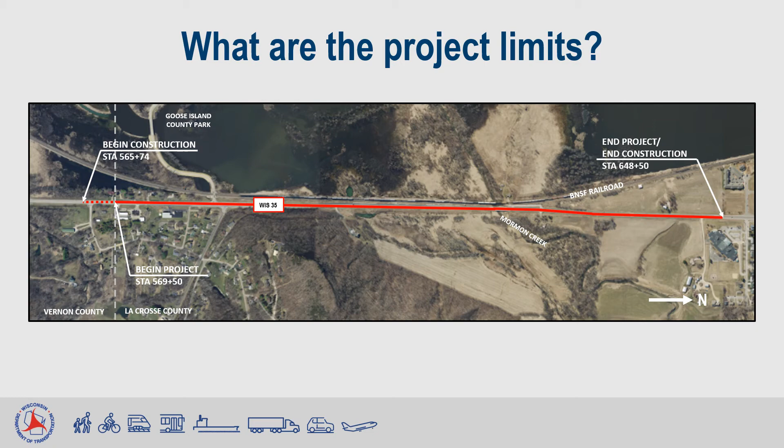Why do we need this project? The following needs have been identified on this section of Wisconsin 35. Deteriorated pavement, traffic safety and operations on Wisconsin 35 at the County K and County GI intersection, substandard culverts and overgrown ditches along the highway south of the County K and County GI intersection, existing deck, parapets, and abutment deterioration for the bridge over Mormon Creek.

The existing pavement on Wisconsin 35 is experiencing distress and significant cracking, along with raveling edges and centerline deterioration. This pavement deterioration causes increased maintenance costs, poor ride quality, and presents safety concerns. County K intersects Wisconsin 35 from the east at a skewed angle of approximately 65 degrees. This skewed intersection geometry is proven to create operational and safety problems at stop-controlled intersections.

The intersection of Wisconsin 35 and County K is offset approximately 150 feet to the north of the intersection of Wisconsin 35 and County GI. Compared to four-leg intersections, offset intersections exhibit more crashes. In addition, County GI has limited vehicle storage length between the railroad crossing and the intersection with Wisconsin 35. This causes safety issues at the railroad crossing when larger recreational vehicles exiting Goose Island County Park are stopped at the intersection waiting to turn onto Wisconsin 35 and vehicles extend onto the railroad tracks.

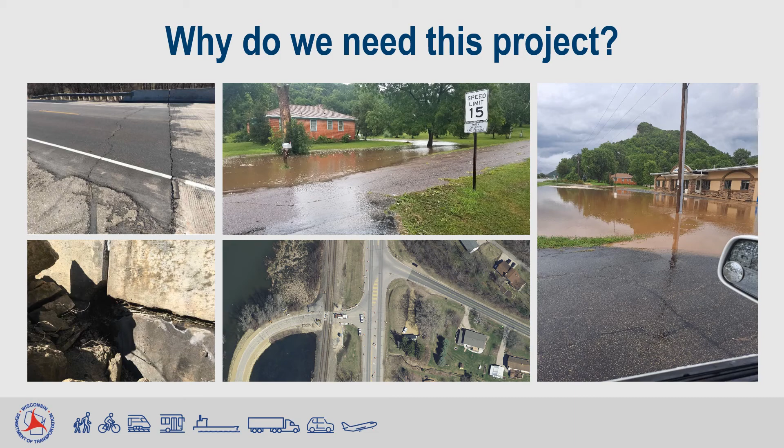Drainage concerns have been identified along Wisconsin 35 south of County K and GI. Existing culverts do not meet current drainage design standards. Culverts are plugged and ditches are overgrown, prohibiting drainage conveyance. Property owners have experienced concerns with flooding near their properties, as shown in the photos. The existing deck, parapets, and abutment on structure B32-163 over the Mormon Creek are showing signs of deterioration and damage. These deficiencies result in costly expenditures to maintain.

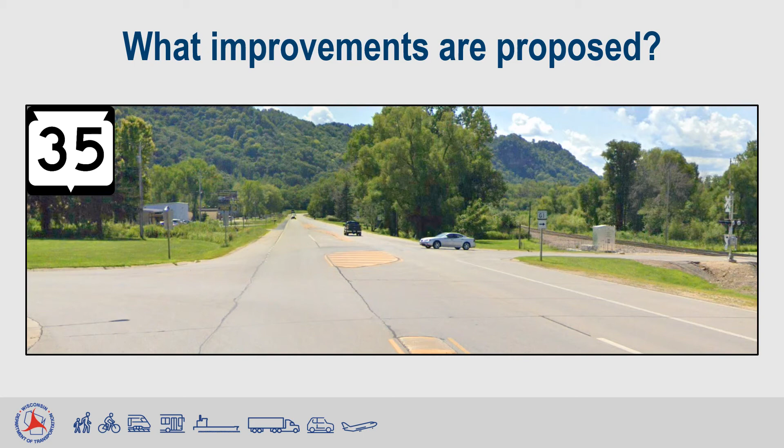What are the proposed improvements? The next collection of slides explain the proposed improvements and show the typical section of Wisconsin 35. To address the safety concerns and pavement deterioration, the proposed construction on Wisconsin 35 would consist of removing the existing asphalt pavement and gravel and replacing it with 5 inches of new asphalt pavement over gravel between the La Crosse-Vernon County line to Sunnyside Drive. The pavement structure south of the Mormon Creek Bridge would also include a subgrade improvement with select crushed material and the installation of geogrid to address underlying poor soils that cause pavement deterioration.

There would be a new shoulder gravel placed in the rural section of Wisconsin 35. New curb and gutter would be installed along Wisconsin 35 near the County GI and County K intersection. Grading will take place for a future shared use path along the west side of Wisconsin 35 from County GI to Sunnyside Drive. New pavement markings and signs would be installed.

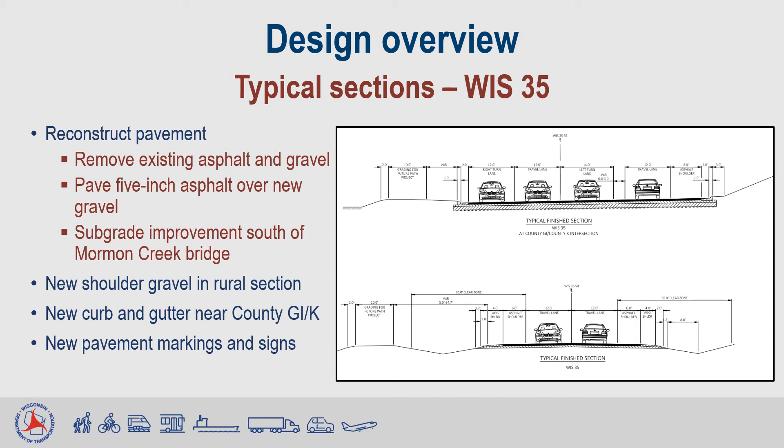To address traffic and safety operation concerns at the intersections of Wisconsin 35 and County GI and Wisconsin 35 and County K, the following improvements are proposed. 1. Realign County K to line up with County GI for a four-legged intersection. 2. Shift the new Wisconsin 35 County GI County K intersection east to increase storage distance between Wisconsin 35 and the railroad crossing on County GI. 3. Widen the intersection to provide offset left turn lanes. And 4. Add right turn lanes on both northbound and southbound Wisconsin 35.

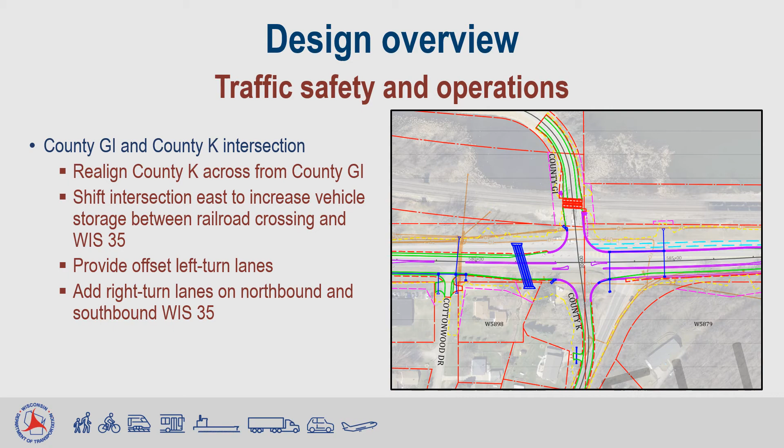A thorough review of the existing conditions south of County GI and County K concluded that the drainage discharge points can be summarized into two general locations. The North Culvert System is a set of 36-inch triple metal culverts under Wisconsin 35 just south of County GI, County K. The South Culvert System is a set of 36-inch triple metal culverts under Wisconsin 35 just north of the La Crosse-Vernon County line.

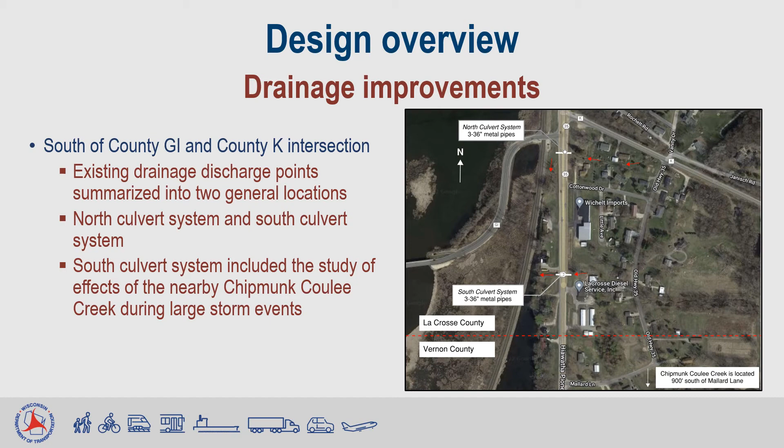As part of the South Culvert System, a drainage analysis of the Chipmunk Coulee Creek, located approximately 900 feet south of the project limits in Vernon County, was conducted to determine if the Chipmunk Coulee Creek overtops its banks and causes flooding to adjacent properties during large storm events.

When reviewing the existing terrain for the North Culvert System, the drainage area entering these culverts encompasses a watershed north of County K that enters a large drop inlet in the northeast corner of the Vanity Drive and Jansch Road intersection and exits in the southwest corner of the intersection.

Runoff then enters a 60-inch corrugated metal culvert pipe that flows under County K on an angle and exits south of County K to an existing drainage swale that flows west to the three culverts under Wisconsin 35 just south of County GI. The existing drainage swale flows between residential properties and it appears to be mowed and has limited capacity.

Based on the photos from the recent storm event in August 2021, the existing drainage swale doesn't appear to have enough capacity for rainfall runoff entering the area and is overflowing into adjacent low-lying residential area for relief. The area has seen significant flooding in the last 15 years and has been much worse than what is shown in the photo. The area in the ditch leading to the entrance of the three culvert pipes under Wisconsin 35 south of County GI is currently heavily vegetated and overgrown.

To address drainage concerns within the North Culvert System drainage area, the following improvements are proposed. 1. Replace the 36-inch triple metal culvert pipes under Wisconsin 35 just south of County GI with three 58.5-inch by 36-inch concrete pipe arch culverts and concrete masonry end walls.

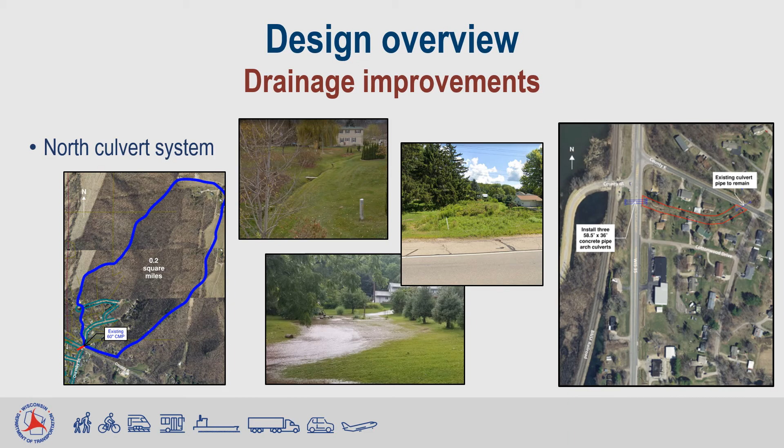When reviewing the existing terrain for the South Culvert System, the drainage area entering the existing set of 36-inch triple metal culverts under Wisconsin 35 just north of the La Crosse-Vernon County line encompasses a watershed boundary of approximately 125 feet north of Cottonwood Drive, Old Highway 35, and Mallard Lane. Town of Shelby and property owners reported that lands located within this drainage area have experienced multiple flood events since 2007. This area is displayed in the first exhibit on this slide.

Project photos confirm that the existing culvert pipes under Wisconsin 35 and adjacent driveways are often clogged with debris or buried, impacting the available capacity. This area is a low-lying area east of Wisconsin 35. A 2D steady-state hydraulic model was developed by WisDOT to review the effects of the Chipmunk Coulee Creek and how it impacts the South Culvert System study area.

The existing conditions model confirmed that the Chipmunk Coulee Creek overtops its banks and causes flooding to adjacent properties, primarily to the east of Wisconsin 35 during large storm events, particularly the 100-year design storm frequency. A portion of the overflow extends into part of the South Culvert System drainage basin, bounded by Cottonwood Drive, Mallard Lane, and Old Highway 35. This area is in a low-lying area relative to the surrounding terrain.

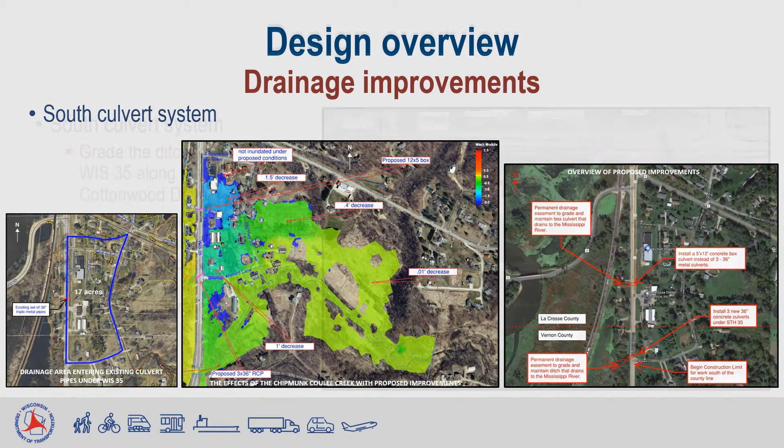Area B in the southeast corner of Wisconsin 35 and Cottonwood Drive and the ditch in front of the property located at N162 Wisconsin 35 is also a part of the sub-basin area. The rainfall runoff in this area is intended to flow through the existing 24-inch metal culvert under the driveway and the ditch along the east side of Wisconsin 35 to the existing set of 36-inch triple metal culverts just north of the La Crosse-Vernon County line, but the driveway culvert is clogged with debris and buried.

To address drainage concerns within the South Culvert System drainage area, the following improvements would be proposed. 1. Grade the ditch to drain east to west along the north side of Cottonwood Drive into a 24-inch reinforced concrete pipe under the driveway for W5898 Cottonwood Drive. 2. Install a 24-inch storm sewer system with field inlets along the ditch on the east side of Wisconsin 35 from Cottonwood Drive, exiting once past the driveway at N162 Wisconsin 35.

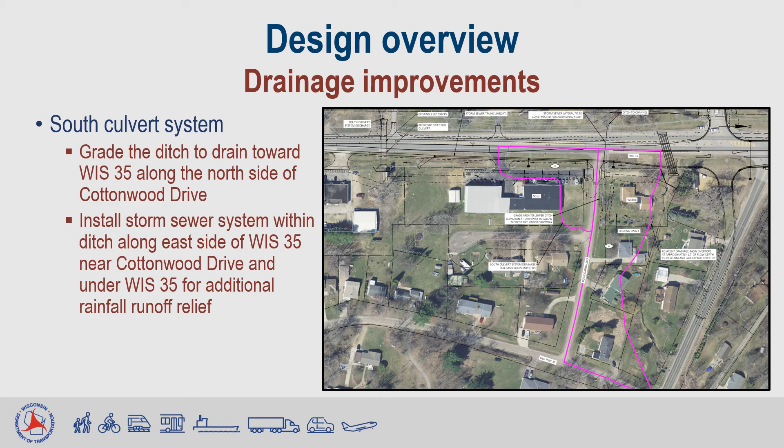And 3. Install a 24-inch storm sewer pipe under Wisconsin 35 just north of Cottonwood Drive for additional rainfall runoff relief for the sub-basin north of Cottonwood Drive and the overtopping of the North Culvert System rainfall runoff.

The Mormon Creek drainage area was also reviewed as part of the project. The existing bridge opening over the Mormon Creek has debris and sediment which has reduced the flow area compared to the original constructed opening. Proposed improvements within the Mormon Creek drainage area include: 1. Debris under the Mormon Creek Bridge and between the bridge and the railroad bridge within the existing right-of-way would be removed, and 2. Sediment under the bridge would be removed to make the bridge opening like the original construction. This would increase the bridge opening area and help with the flow of rainfall runoff.

There is an existing box culvert located approximately 0.38 miles south of the Mormon Creek that crosses under Wisconsin 35 and the railroad track along the west side of Wisconsin 35. This box culvert is part of mapped floodplain of the Mississippi River and serves as a rainfall runoff overflow of the Mormon Creek drainage area as shown on the exhibit on the right. The rainfall runoff reaches a certain elevation along the east side of Wisconsin 35 near the Mormon Creek in large storm events and flows back towards this box culvert as relief. This box culvert would not be replaced with the project.

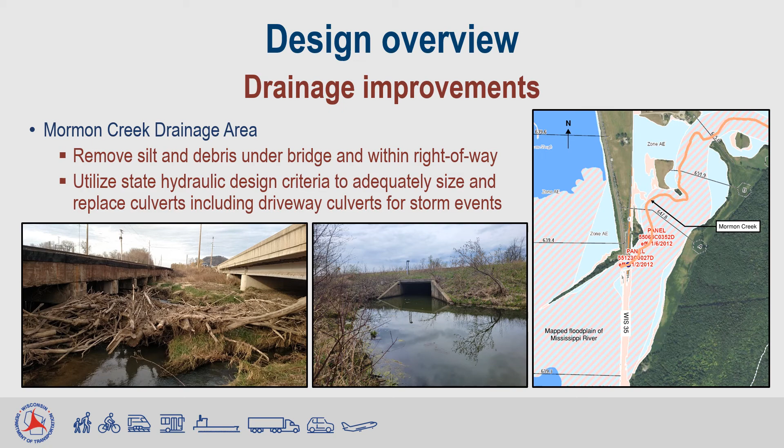Other improvements within the Mormon Creek drainage area include adequately sizing and replacing other culverts under Wisconsin 35 and driveway culverts to accommodate the proposed roadway improvements following WIS hydraulic design criteria for the specific storm events. The proposed structural improvements for the bridge on Wisconsin 35 over the Mormon Creek would include the installation of new concrete approach slabs and spot surface repair on abutments and piers. The bridge deck would be replaced and widened 25 feet east over Mormon Creek to accommodate the roadway shift in Wisconsin 35 and future shared use path.

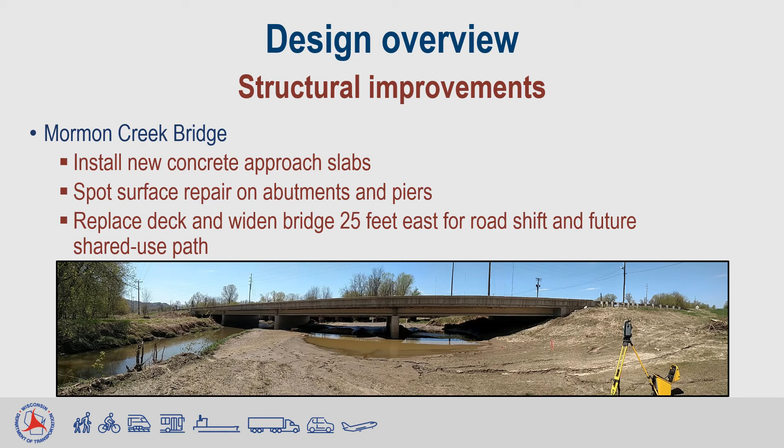Wisconsin 35 property impacts. Right-of-way would be needed near culvert improvements to blend the slopes and provide room for contractors to work, not the entire project. Most of the right-of-way needs would include temporary limited easements, with some spot locations requiring minimal permanent right-of-way to maintain ditches. There would be approximately 9 parcels impacted with the project.

The proposed ditch construction along the west side of Wisconsin 35 near the new box culvert and near the new triple set of culvert pipes just north of Mallard Lane would require a permanent limited easement to provide room for the contractor to work, blend the slopes, and maintain the ditches. The permanent limited easement located near the new culverts north of Mallard Lane would be located on U.S. Fish and Wildlife Service, USFWS, property for which coordination is ongoing. The ditch construction would not adversely affect the U.S. Fish and Wildlife Service land.

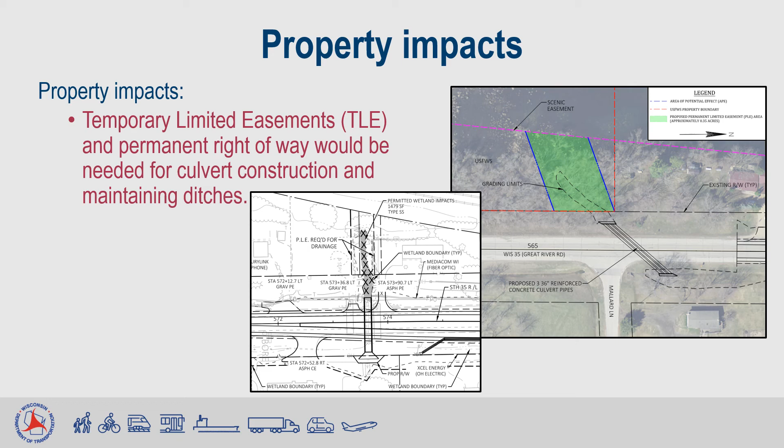What will happen to Wisconsin 35 traffic during construction? The anticipated construction for Wisconsin 35 is currently scheduled to begin in 2025 with possible advancement to 2024. Local and emergency access on Wisconsin 35 would be maintained during construction. During construction, Wisconsin 35 would remain open to two-way traffic with stage construction and temporary widening to accommodate traffic. County GI and County K would remain open to traffic with stage construction, utilizing lane closures with flagging operations during the day. The Burlington Northern Santa Fe Railroad would need to temporarily close County GI to improve the at-grade railroad crossing. Coordination of this closure with the railroad and La Crosse County is ongoing.

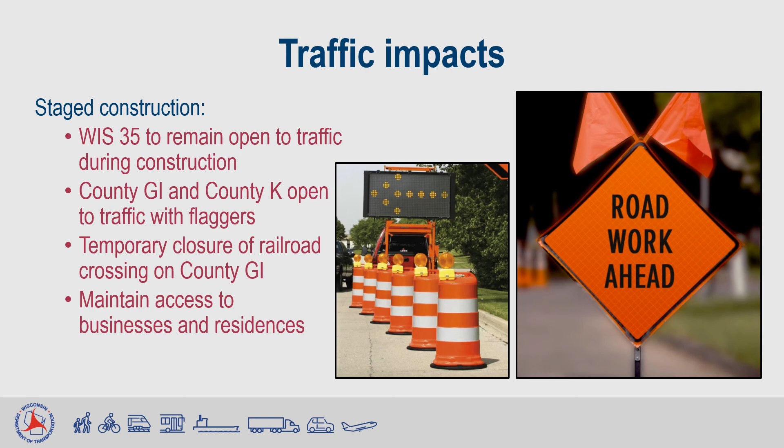There is a possibility that a temporary traffic signal would be required on Wisconsin 35 during construction of the new box culvert just north of the La Crosse-Vernon County line. Motorists would expect lane shifts and shoulder closures throughout the project area. Temporary access to businesses and residents within the project area would be provided and maintained during construction. Driveways would need to be temporarily closed for short periods of time when the driveways are being reconstructed.

What is next? The current project schedule is outlined here. A third local officials meeting took place on May 4, 2022. The third public involvement meeting will take place virtually during the month of June 2022, providing opportunity for the public to provide input regarding the proposed improvements. The real estate acquisition process will begin this summer and will be finalized by the end of the design process. The plans for the project are currently scheduled to be finalized by May 2024, and construction is anticipated to begin in the spring of 2025 with the potential advancement of final roadway plans to February 2023 and construction start in spring of 2024.

Thank you for your participation in this very important project. We look forward to receiving any questions or input you may have. We request that you provide comments by July 1st, 2022. You can do that several ways, either via a written comment form, which is part of the project handout available on the project website, or you may also simply email comments to the address as provided or mail to the Wisconsin Department of Transportation Southwest Region Office in Madison. For those that would like to meet in person to discuss the project, individual appointments can be arranged to meet at the La Crosse office, 3550 Mormon Coulee Road, on June 23, 2022, starting at 10 a.m.